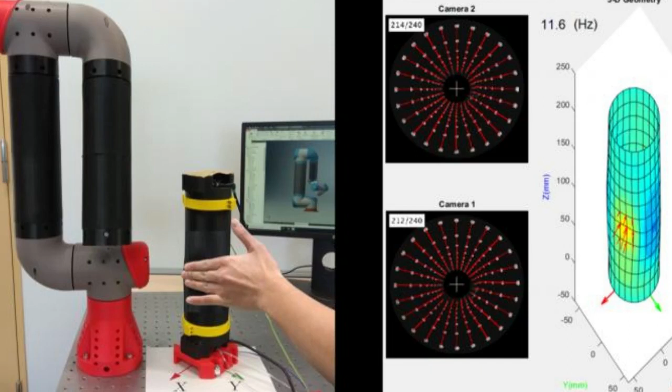Modern day robots are often required to interact with humans intelligently and efficiently, which can be enabled by providing them the ability to perceive touch. However, previous attempts at mimicking human skin have involved bulky and complex electronics, wiring, and a risk of damage.

In a recent study, researchers from Japan sidestepped these difficulties by constructing a 3D vision guided artificial skin that enables tactile sensing with high performance, opening doors to innumerable applications in medicine, healthcare, and industry.

Robots have come a long way since their original inception for high speed automation. Today, robots can be found in a wide variety of roles in medicine, rehabilitation, agriculture, and marine navigation. Since a lot of these roles require human contact, robots are expected to become adept at interacting with humans in a safe and intelligent manner.

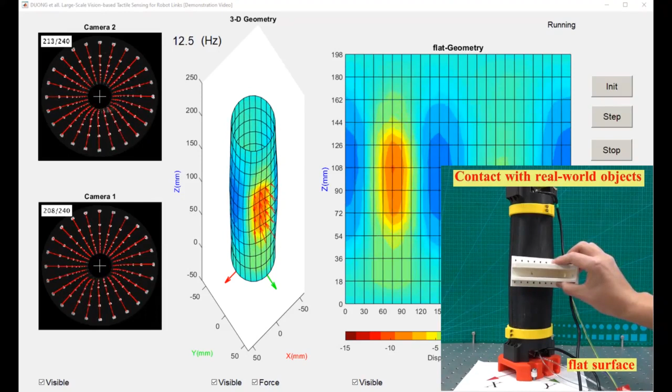One way to accomplish this goal is by endowing robots with the ability to perceive touch. Accordingly, attempts have been made to develop artificial skins capable of inducing tactile sensations and allowing robots to be more aware of their surrounding environment in the same way humans are. However, despite great advances in tactile sensor technology, the endeavor remains challenging.

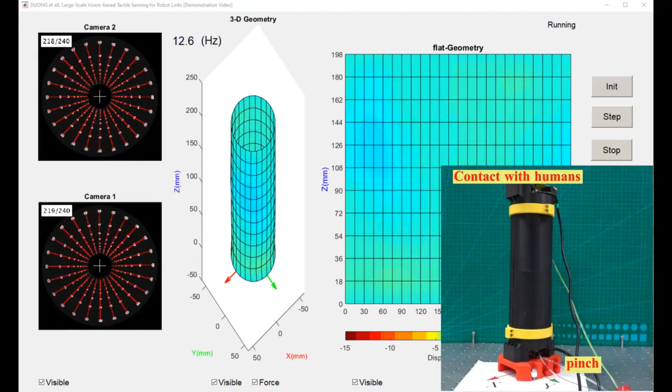The main challenge lies in mimicking the inherent complexity of natural skin structure, that is, a particularly high density of mechanoreceptors with specialized functions such as sensing pressure, vibrations, temperature, and pain. All approaches so far have only focused on developing a skin-like structure with a matrix of different sensors without considering the bulk of wires, electronic components, and the risk of damage from frequent contact.

In a new study published in the journal IEEE Transactions on Robotics, the researchers developed a high performance vision based artificial sensing system that is low cost, has a relatively simple structure, and is scalable. Named TacLINK, this system can process tactile information and even determine contact force and contact geometry upon interacting with the surroundings.

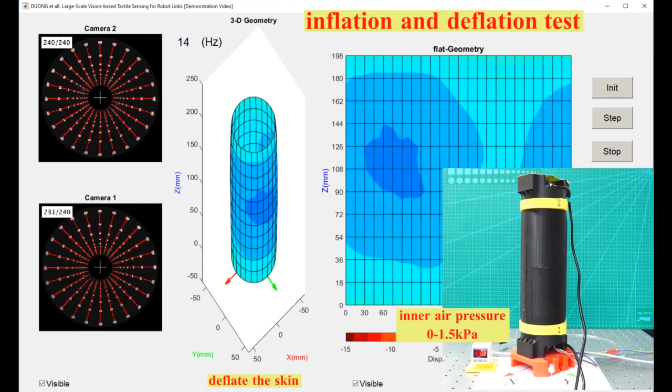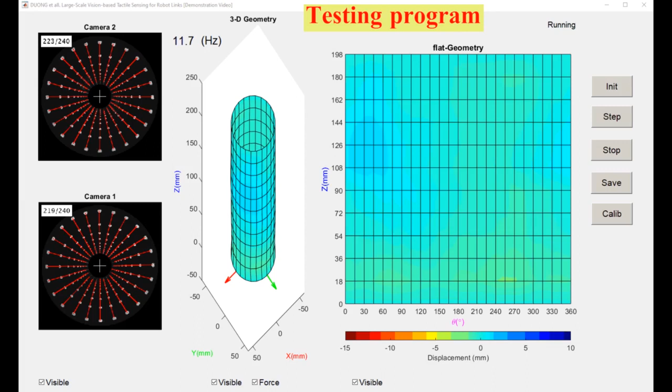The researchers based the structure of TacLINK essentially on a transparent acrylic tube serving as a rigid bone frame covered by a continuous soft artificial skin with a sensing area of about 500 square centimeters. They used silicone rubber to fabricate the artificial skin due to its high elasticity and smoothness. Moreover, the material could be inflated to change its form and stiffness.

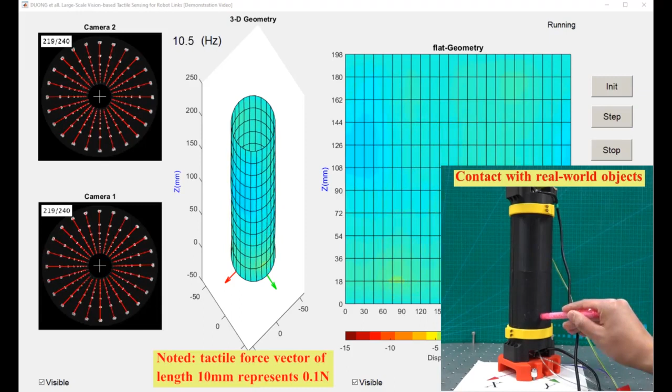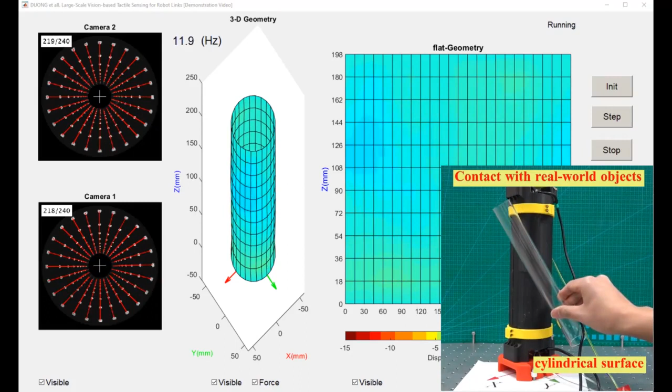The researchers printed an array of markers on the surface of this skin to track its deformation instead of embedding sensors or electronic components inside the skin. This greatly reduced its bulkiness, cost, and chances of possible damage. The vision system consisted of two coaxial cameras arranged to form a stereo camera that tracked the 3D displacement of the markers on the inner wall of the skin.

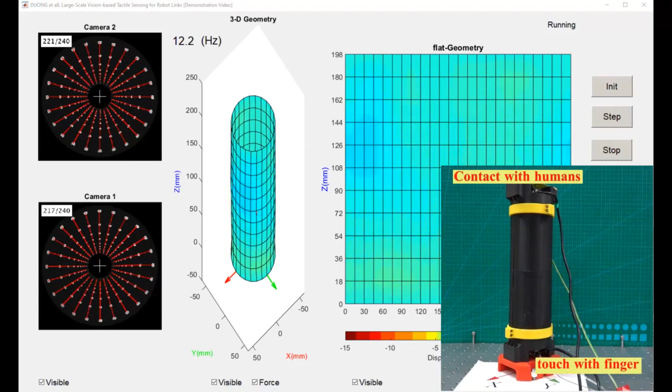In addition, researchers employed a finite element model to estimate the structural stiffness of the skin. By combining the data from both these sources, they were able to reconstruct the contact geometry and the contact force distribution simultaneously. Moreover, unlike in previous studies, this method worked for multiple contact points.

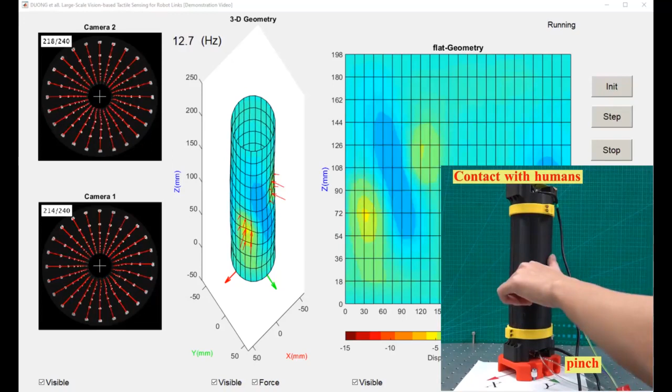With such positive outcomes, the researchers are hopeful about the creation of a future generation of touch sensing enabled robotic devices. The artificial skin used in this study can be easily fabricated by the casting method and can therefore be implemented on other parts of the robots such as fingers, legs, chests and heads, and even for smart prosthetics for humans, allowing a disabled person to perceive sensations the same way as a normal human.

In addition, it can also be used to design various sensory devices in medicine, healthcare and industry. In fact, it is especially suited for the development of robotic systems in the post-COVID era to enable remote service with robotic avatars. It certainly seems like the robots of the near future will be touching human lives more than ever before.